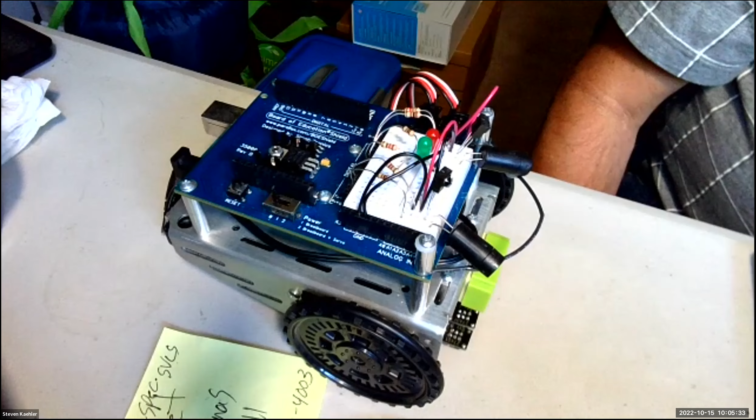Boy, that is really... okay, let me try this again here. I'm going to share. Maybe I'll try it this way. No, let's see. Get rid of that, it's not the one I want. That's the one I want. Okay.

Sorry about the technical Zoom issues here. Good grief. No, come on. Huh, it's interesting, it seems to be mostly having issues just with actually sharing the screen. It's like the camera feeds come up right away, but other stuff takes a while, there it comes. Good grief, okay, so I talked about that. Oops, oh that's weird, why does it keep doing that?

You've got to mute the mic on the video on that side. You've got your video, your audio muted, Steve, and the bot is what's picking up your voice, so every time you talk it switches to the bot video. You're going to have to shut off the speaker on that other one, or maybe it'll be okay now. It seems like it's still doing something wonky. Usually that happens when the sound is coming out of the one that you wanted muted. I don't know if you can turn off the sound on the robot one, or we'll just have it switch to the robot every time you talk, Steve. Who cares?

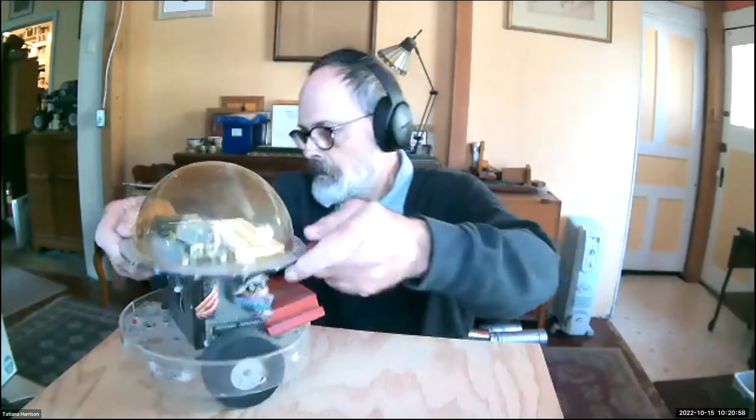Hang on, okay. So what was really cool about that robot was that he was able to create a walking robot with a single servo, because I don't think anybody had ever seen anybody do anything like that before. That was what was so wonderful about that Johnny Walker. Oh, there we go, yeah, that'll help.

Okay, now pull it toward your edge of the table, of the board there. There you go, yeah, there we go. Now we can see the whole thing as it's moving. All right. Can you make it go again for us?

Oh, you're mute, you got muted somehow. So can you hear if I talk now? Yes, we can. Okay, as long as I hold my finger on this button, apparently you can hear me. So what button on the keyboard do you hit to keep being heard? You have to click the mute symbol with the mouse. Oh, there's a mouse. Should be on the bottom. This is my wife's, yeah. Did that work? Yes, we're hearing you. Oh, yeah, that's what we want.

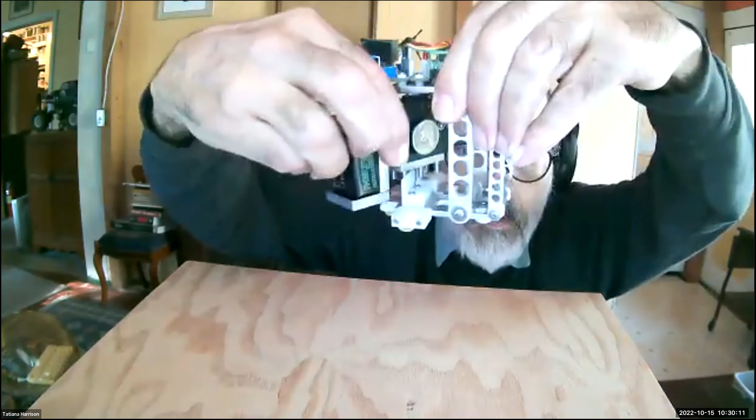I don't know if you can see the pins on the bottom, but that's what makes it go. Each foot, all it has is an L-shaped piece of plastic attached to the foot, and the pins are what make it walk. See, the pins push the feet, and that's why we needed the friction, so it would push the foot and then keep it there and then move on. And it can do slight inclines, but it's not designed for any kind of tilting or rough material or anything like that.

But yeah, it was quite an interesting project. I am slowly, and since you remember when this was built, slow is really an understatement, working on a Johnny Walker 2, so it's going to have 2 servos. And on that, I wanted to do something a little different. And of course, I'm a total masochist, so one servo would control a foot moving forward and backwards, and the other one would do the lifting up and down. You think, oh, that makes sense, until you realize you still have to deal with all the balance and how do you do the turns and all this stuff again. But yeah, I'll fiddle around with it.

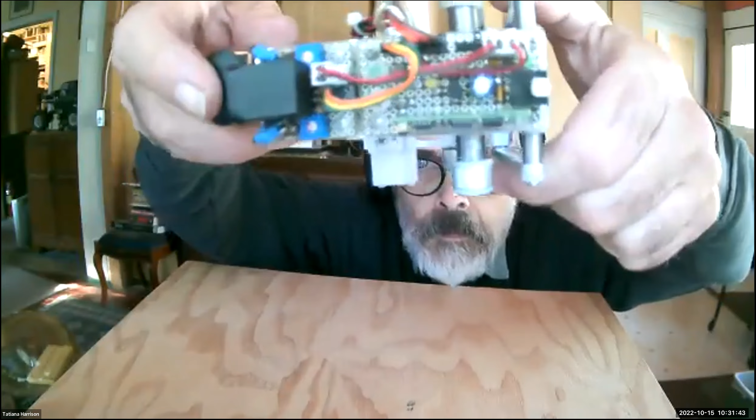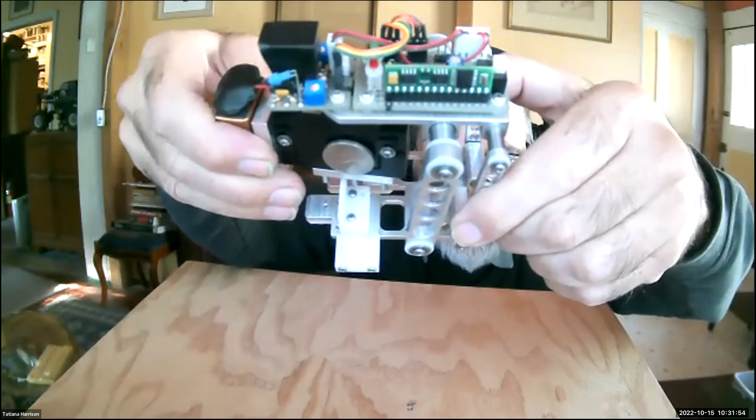That's pretty tight. Huh.

Very cool, thanks for sharing. Yeah, thanks Bill, that's a blast from the past, that's for sure.

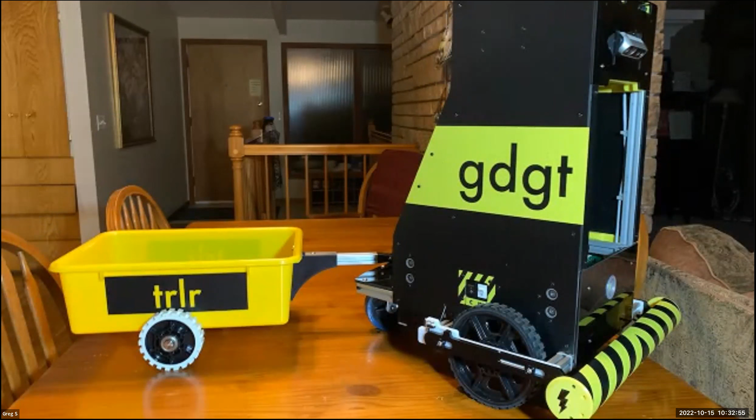I recently, as you can see by my backdrop, put some vinyl stickers on Gidget and her trailer to kind of add a little branding there. And to further that branding, I've got the Gidget Pit Crew t-shirt.

So, on November 5th, I may not successfully get the can out of the refrigerator, but I'm going to look good failing. In terms of progress, I feel confident that Gidget can locate the can, grab the can, and carry the can. Obviously, that's not going to accomplish the task if she can't find the refrigerator and get the door open.

So that's what I'm currently working on. I believe I've got the code done, or close to done, for identifying the refrigerator. And I'm currently working on code to navigate to the refrigerator, and then I will work on getting the door open.

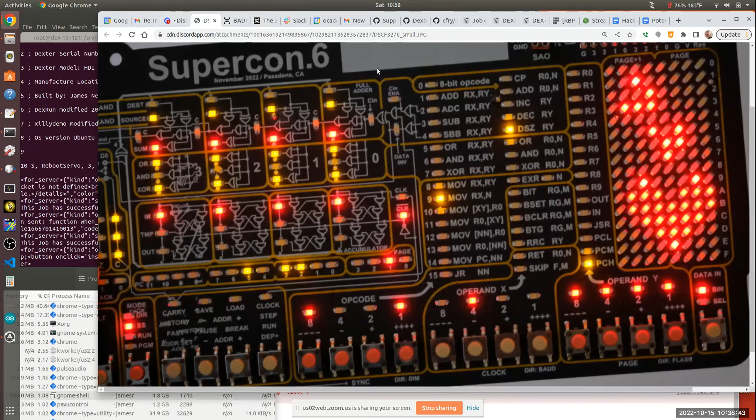No, I think there's a picture of the hardware expansion board. It's sort of reminiscent in a way of the old Altair, where it's lit up from the front, that's what it reminded me of. I was playing with the Altair, right, all of those front panel type machines with switches.

So anyway, I just thought it was absolutely beautiful, and I wanted to share that, even though it's sadly not a robot. I'm trying to figure out how to find time to hook a couple of servos up to it, and that's why I was asking about that walking machine. It's too complicated for me to build, but if I could, I'd make my badge walk with a single servo. I think everybody at the show would really love that.

Well, thank you for sharing that. And if it's cool technology, we want to hear about it. So don't feel like if it's not a robot we can't talk about it in an SRS meeting. We're a little bit more open-minded than that. You know, it's got to at least have legs. No, well I figure anything that's a computer is potentially a brain for a robot, so it's a robot component.

Does it have outputs that you could set stuff up to? Yeah, absolutely, there is an output bus, and they're supposedly making a breadboard board for it, so you'll be able to have it in the same shape as a solderless breadboard, but it's a PCB, like those little things Adafruit sells where you breadboard it first and then solder it onto that. So you can have the same kind of layout as a solderless breadboard. I'm going to see whether or not I can hook a servo up to it and get it to actually move something, and have my badge wave at people or something like that.

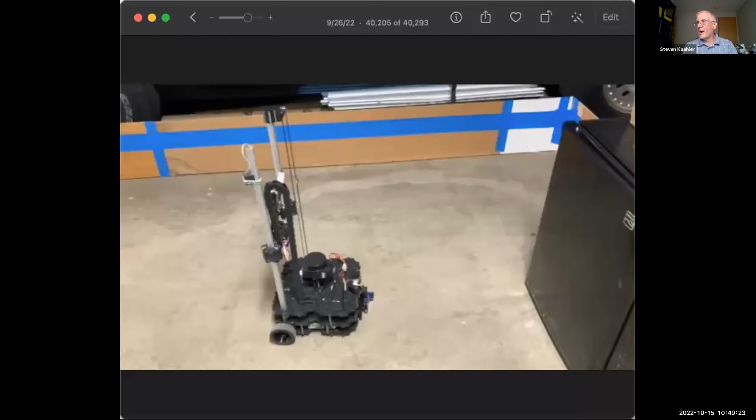Hi guys, yeah, let me bring up my screen here. That's a really awesome high-tech background you have there. Oh, yeah. So can you guys see a screen there with my setup? Yes, okay good.

So I thought I would share a little bit of what I've been doing recently. It was navigating and retrieving a pop can, but I got this little three-minute clip of it actually opening and closing the door. So we started here. The perfect video for the perfect time.

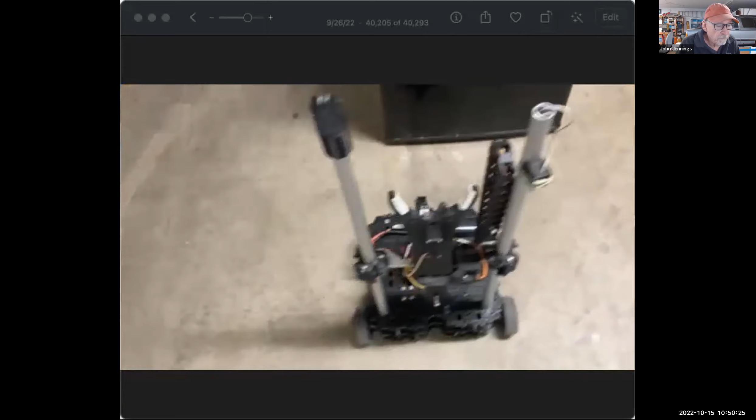One major problem I discovered at the last practice session was it had really bad traction on the concrete floor. So I ended up moving the wheels to the back end of the robot underneath that elevator, along with changing some of the wheels and the caster. Unfortunately, that screwed up my plan on how to open the door.

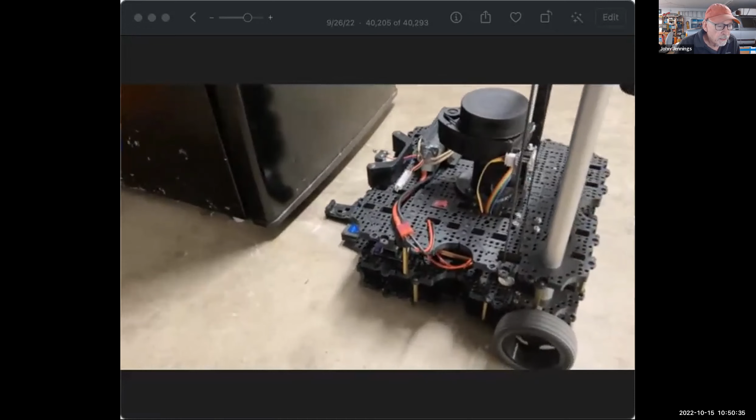Door open. Now that the wheels are at the other end of the robot, I wouldn't be able to maintain that position on the door.

So what I ended up doing was using a program that comes with ROS called... let's see, what's it called again... ROS bag files. ROS bag files are basically recordings of messages on the topic you choose, and then you can play back that message. So what you're going to see in a second here is, after it gets the door cracked open...

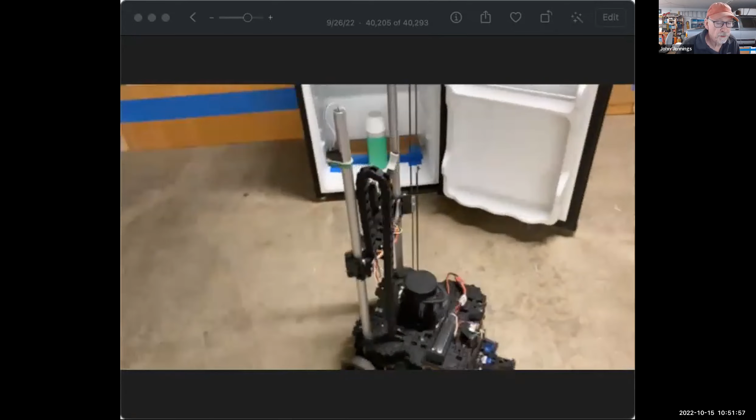And then once it's in front of the door, I'm skipping ahead so you can see it actually closing the door. In which case I'm using the same type of process, playing back a bag file that I recorded where it's actually just closing the door.

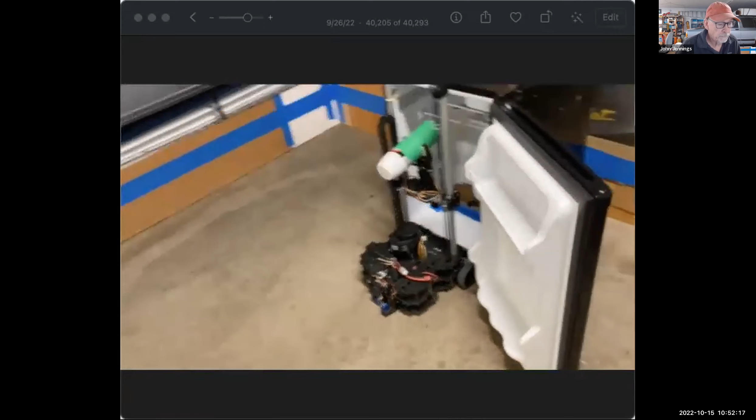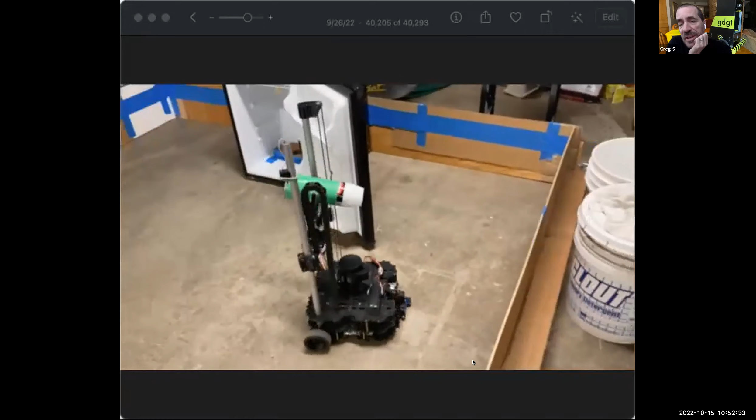Well, that certainly answers a question for me, John. If a TurtleBot, because I have one so I know what it can and can't do, if a TurtleBot can pull the door open, my other one's definitely going to do it. But John, is that using your Jaws of Life door opener?

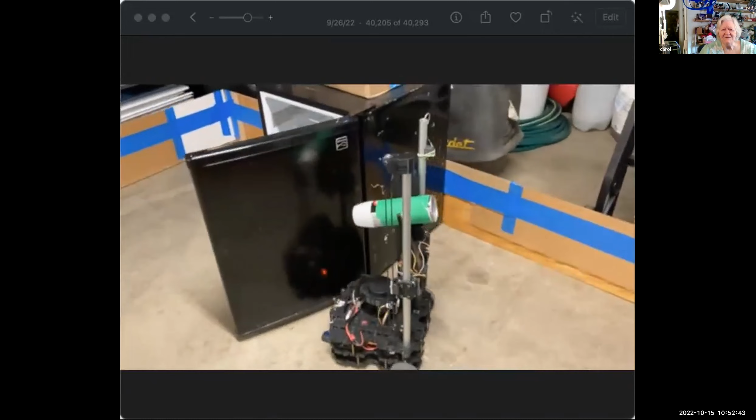Yes. Can you explain exactly what that is? Oh, it's just a homemade linear servo, or actuator, and it's reaching in and getting into that gap between the door and the refrigerator, and pulling that open with a little hobby servo. It's just turning a screw to spread that open, while pushing against the frame. So he's not using the drive motors to break the seal. Correct.

Gotcha, and what size actuator or servo did you use? Oh, it's just a little tiny hobby servo, because it's just turning a very fine threaded screw to open it up. So it didn't need a lot of force, it creates a lot of torque just by turning that screw. Okay, because I have several other actuators that I could probably do the same thing with. Is it a continuous servo, or were you able to achieve that? Oh yeah, it's a continuous rotation servo.

So please proceed. Well, thank you very much, Steve, for inviting me here today. So hello, everyone. I'm Nicholas, based in Montreal, bit of a roboticist. Let's call myself a full stack hardware engineer in a lot of ways. So as Steve mentioned, right now I'm the CTO of Halodi Robotics, a Norwegian robotics company.

So speaking of international, it's nice to bring, especially with the technology we have today, people from all around the world to work on a common passion. So that's what you see in the top left. We build about a 6 foot tall humanoid robot currently used in security guarding, some Industry 4.0 applications, and retail.

We recently signed, I think at the beginning of this year, the world's largest order for humanoid robots, ADT Commercial, so the blue hexagon. They ordered hundreds of robots that they'll be deploying over the next year or two as security guards. Basically, can we help automate the dull and dangerous task of that 2 a.m. night shift that's just going up and down that dark hallway, not doing much.

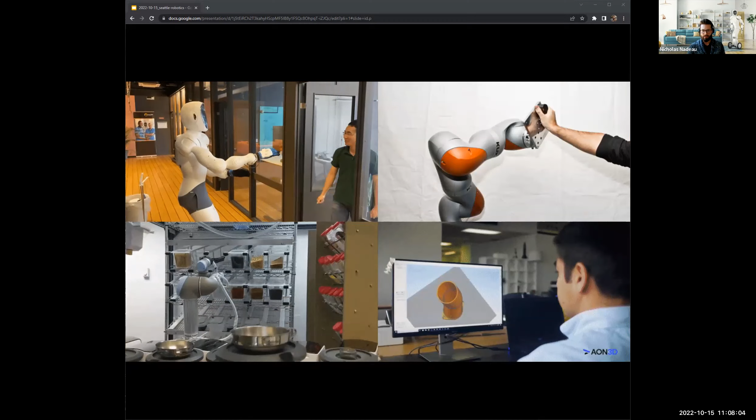Otherwise, did my PhD at ETS, École de Technologie Supérieure here in Montreal, on, as Steve mentioned, collaborative robots, applying a lot of the machine learning, robotics techniques, force control, and things like that to medical ultrasound. So really taking a health and safety approach.

Ultrasound technicians and sonographers, they had a higher rate of carpal tunnel syndrome while performing their work from doing repetitive motions with the probe. And so can we help robots work alongside them and do that in a collaborative fashion, human-robot collaboration, to help reduce the occurrence of things like carpal tunnel syndrome?

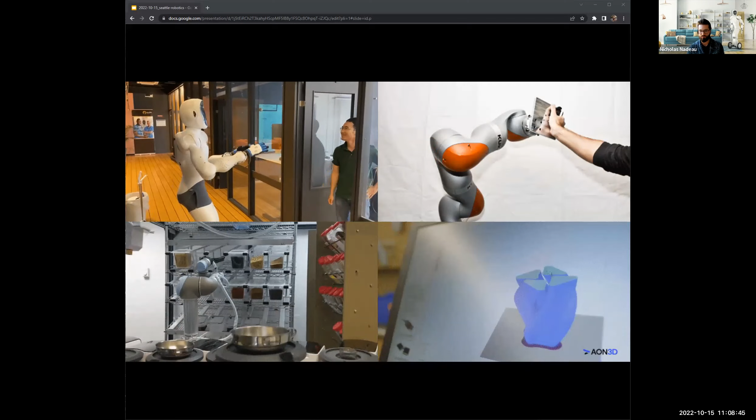Brought some companies through accelerators in the venture capital world. One was a food robotics company using the universal robot arms. Can we automate the kitchen in a lot of ways? Doing these rote, dull tasks that we're having a lot of trouble with, a human labor shortage right now.

And then I spent a period of time actually as the head of engineering at AON3D, an additive manufacturing, so high performance 3D printing company, where we're able to print very large, so about a meter tall by half meter by half meter print volumes of PEEK, PEKK, and Ultem, mostly for the aerospace, medical, military markets. And we actually got the first parts on the moon and the space station built out of Ultem. So that was a lot of fun.

And so today's talk, we could save for the discussions. I'll talk deeper about like Halodi or anything like that. But it's going to focus mostly on Pybotics, which is the software package in Python that I wrote back in the day. Steve asked me to talk a bit about that.

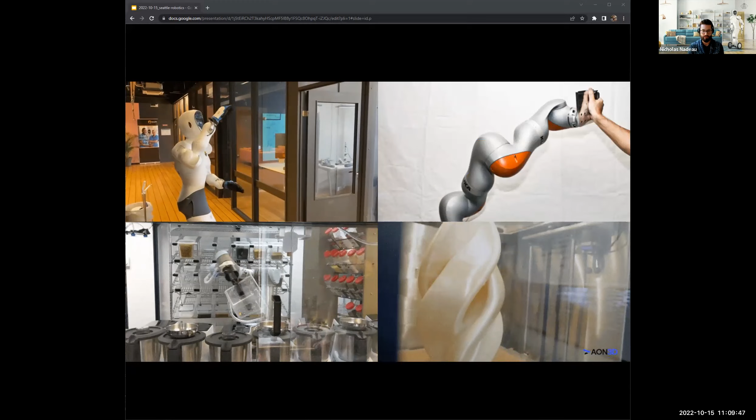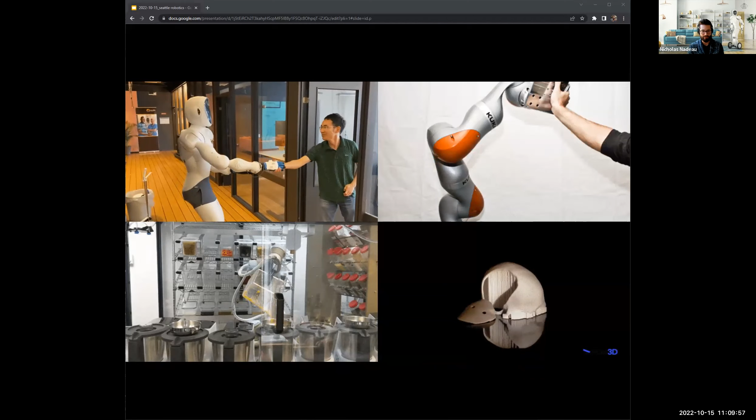We're going to dive into some of the ultrasound work, some force control, robot optimization, robot calibration. A lot of this actually stems from my original background was in mechanical engineering. So I started off as a mechanical engineer in the biomedical field, designing brain implants, brain imaging devices, things like that, and eventually got into surgical robots. And from there, I realized that accuracy, calibration, all those things were pretty important. So we'll be talking about Pybotics and calibration. We'll be going into impedance control calibration, some hardware in the loop stuff, especially seeing the projects you guys demonstrated today.

Each of the joints in the KUKA robot is a harmonic drive gearbox. I won't get into the details of that, but let's just say it's a very, very large torque ratio, or drivetrain ratio, between the input and output stages. And this allows you to create very precise motions. Unfortunately, each of those gearboxes costs anywhere from $1,000 to $2,000, which makes it a very expensive robot, especially when you have 7 degrees of freedom on the left.

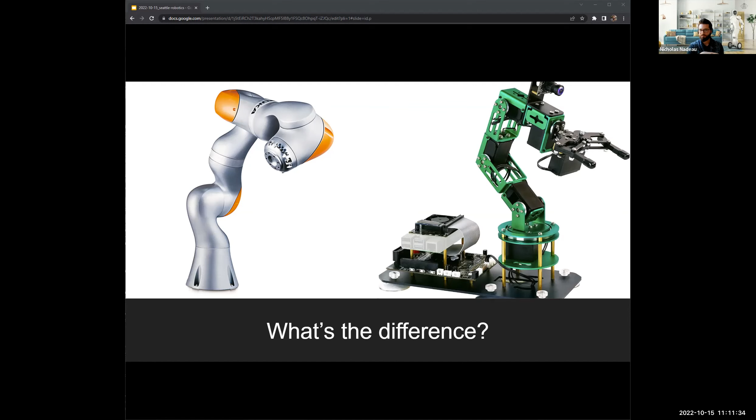A lot of people mix up these two terms. There's precision and there's accuracy. Precision is also known as repeatability. Robots are very precise out of the box, especially industrial robots. You can go back to the same position in space over and over again. With a high-end industrial robot, you'll probably hit it in the 1 to 10 micron precision range. But out of the box, a lot of these industrial robots are absolutely terrible at accuracy, anywhere up to a centimeter outside of your target position in space.

This really stems from the fact that robots work in joint space. So when you command a robot to go to the same location over and over again, it's essentially saving those joint encoder positions and just going to that very accurate joint space position. When you tell a robot to go to an arbitrary position in your XYZ Cartesian space, it has to really figure out where that is using things like forward and inverse kinematics. And you have all the little inaccuracies from machining, from assembly of the robot, up the kinematic chain that produces an inaccurate final positioning of the robot.

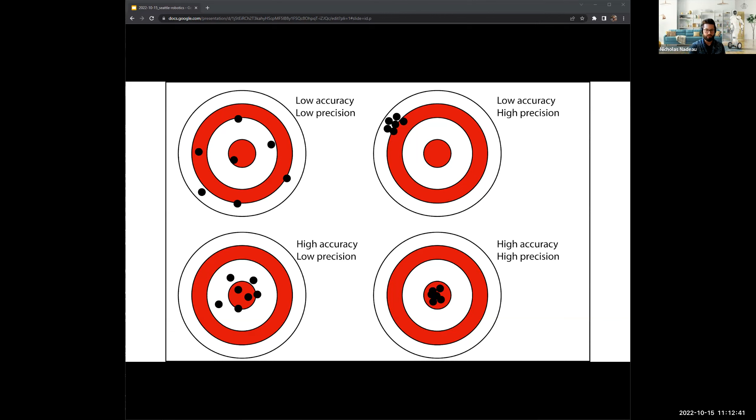So where is accuracy important? Well, it really comes in when you're doing things like offline programming, which is more and more popular in the industrial space. You don't want to necessarily shut down your whole assembly line to program your robot for the next job, because time is money. So instead, we simulate the robot work cells and production lines offline, able to do all the motion planning and everything ahead of time, and then deploy them onto the robot. So you have much more reduced downtime.

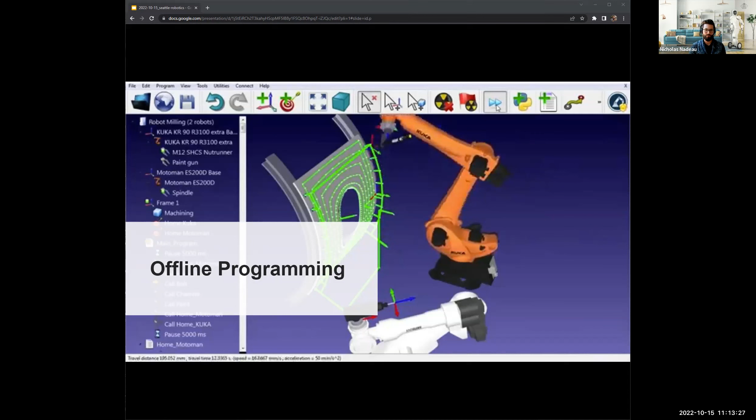And as a roboticist, you get to do all your programming while you're in your PJs at home. The unfortunate part is if your robot in simulation isn't the same model as your robot in the real world, it will lead to a lot of collisions and crashes. So we want to make sure that the sim-to-real gap is minimized as much as possible. By calibrating the robots, we're able to more accurately transfer this offline plan to the real world robot and achieve the results we expect.

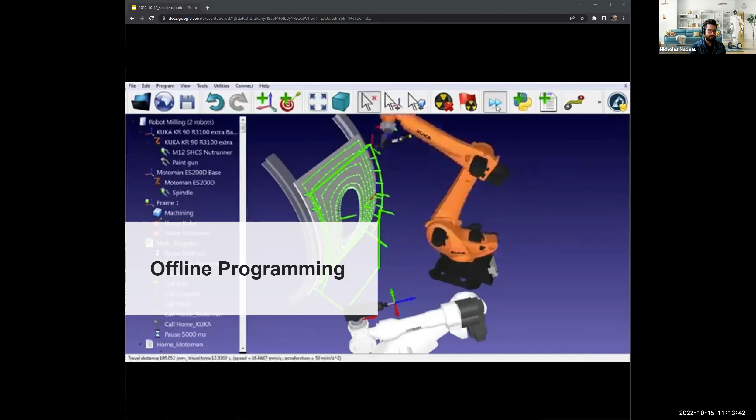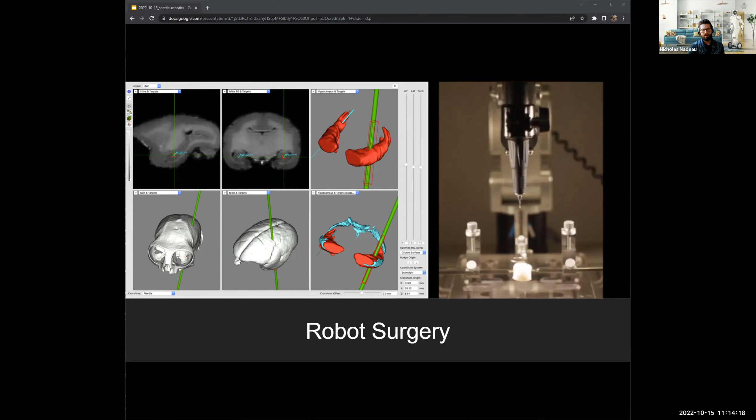So what are we actually doing when I say calibration? Well, we're correcting for the joint inaccuracies, the position inaccuracies, the distance inaccuracies along the kinematic chain. My favorite way of describing robots is modified Denavit-Hartenberg parameters. You have essentially 4 parameters per joint along the kinematic chain. And what you're trying to do is get a better value for those parameters in an iterative fashion, such that the transforms along the robot's kinematic chain are as accurate as possible and match the real world robot.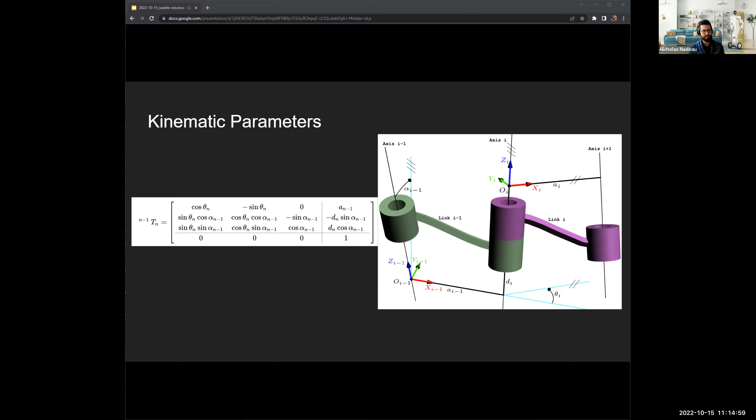Most robots out of the box, the company will provide you what the nominal kinematic chain is supposed to be, and it's nice round numbers usually. When you start to do the calibration, you find out what the actual values are.

So why did I put together Pybotics? Back in PhD days, I realized that everything was a MATLAB toolbox in the end. I could go down a rabbit hole of why I do not enjoy MATLAB. So I wanted to put together something that was in the Python ecosystem, which was much more open source, much more freely available to everyone outside of academia, and really be part of that open source movement of democratizing these tools.

I also want to connect it to the ongoing work in the scientific compute and the ML ecosystem. So everything from scikit-learn to NumPy to SciPy and the TensorFlow, PyTorch packages that were starting up 10-ish years ago. If we could vectorize our robots, we can then basically apply machine learning and optimization to them using these open source tools, which got me thinking.

It's freely available, if any of you want to check it out later on. I have Jupyter notebooks and everything up and running for demos. It's actually been published, so there's open source publications as well talking about this, and a whole bunch of applications using this in the real world.

Otherwise, the big focus of this package is really to do kinematics, dynamics, and calibration such that you're more easily able to do trajectory generation, some other robotics algorithms, and the AI ML attached to that. So it's a bit heavy on the mathy side, but it's one of those fundamental tools that lets you really get started and then go on further to explore and optimize your application.

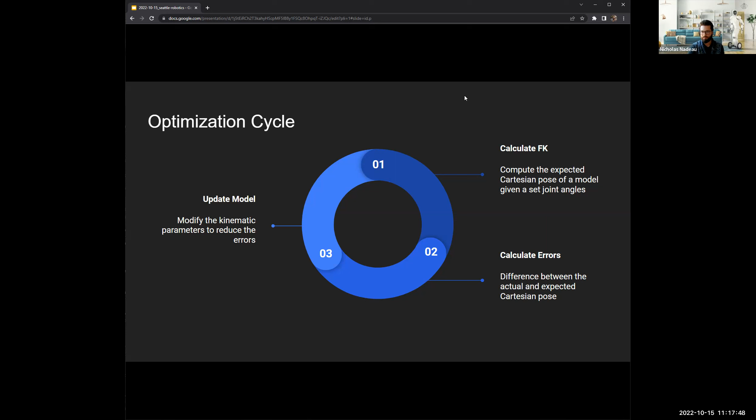So what this looks like in the actual code: first we calculate the forward kinematics and compute the expected Cartesian pose of the model given our joint angles. We calculate the errors between what the nominal model says is the position in space and what we actually measured. And then we update our model accordingly and we try to recalculate. It's just a big cyclical loop until you get a better model and an error that passes a threshold that you set.

In Pybotics, the way I set it up was I want to vectorize my robot. I want to represent the robot as a vector of floating point numbers, essentially, that we can minimize. So the robot is modeled as a vector of your tool frame, your kinematic chain, your world frame. Your tool frame is essentially your transform from your last joint to your tool center point. So like what Greg was showing there with his big jaws of life claw, it'd be the transform from the attachment point on the rest of the robot arm all the way to that, probably the last tip there, or maybe even the center of the gripper.

Your kinematic chain is your modified Denavit-Hartenberg parameters along the robot. So you have your alpha, your A, your theta, and your D, which represents your transforms along the robot arm. And then you have your world frame, and this is actually probably one of the most important frames on there. It's really, where do you designate the origin of your robot space to the base of the robot?

I got to, during my PhD, play with some really fancy tools, and I'm not going to lie, this was a lot of fun to play with a Faro ion laser tracker.

This is essentially a measurement device that lets you measure any position in space using these spherically mounted retroreflectors, or SMRs. It lets you measure an accurate position in space at plus or minus 5 microns in a 50-meter sphere. So a super accurate little R2D2 bot.

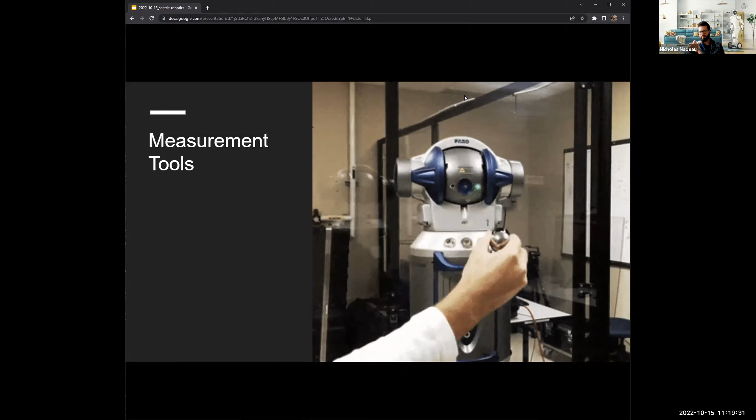We essentially attach the SMRs to the end of the robot and move the robot around, having this little R2D2 track the robot's position in space and build up a data set of positions.

This is what the measurement process actually looks like. I attached a plate to the end of the robot with that SMR attached, and had the robot do a dance for hours upon hours upon hours. And like any good grad student, this was probably filmed at 3 a.m.

I wanted to collect the best data possible, so doing it in the middle of the night when no one was around meant less vibrations in the building and everything like that. We eventually come to having a point cloud of positions in the robot's workspace that we can then optimize around.

With Pybotics, I was able to make the whole optimization process, going from an inaccurate robot to an accurate robot, just 29 lines of code, importing standard Python tools like Pandas, SciPy, and scikit-learn. We're able to load a robot model from Pybotics, which represents that vectorized version of the robot and its kinematic chain, and load our positions and joints from the CSV of the data we recorded.

With scikit-learn, I like to split the data into a training set and a testing set, and then we optimize, running for the most part just a least squares optimizer to minimize the model's errors with respect to what we measured in the real world.

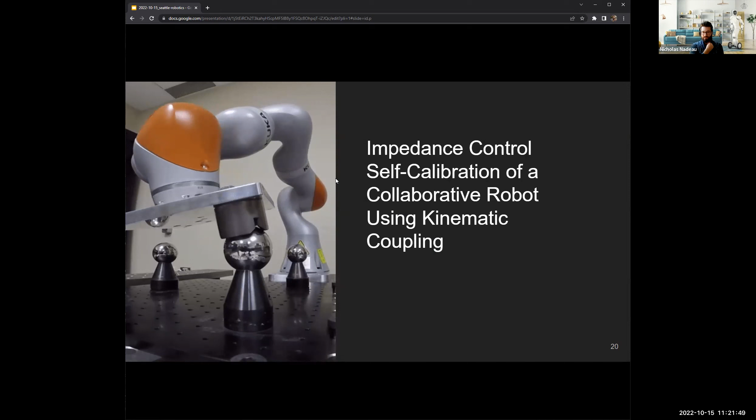So we developed a method to try and reduce the barrier to entry into calibration. Using basically standard mechanical engineering tooling balls and kinematic coupling, this whole setup costs less than $1,000 compared to the $100,000 laser tracker robot.

The tooling was composed of the calibration plate with large tooling spheres and a trihedral coupling, which has a magnet embedded into it. This helps it stick onto the tooling balls as best as possible. And especially since this was a force-controlled robot, we were able to take advantage of that force control to get a more accurate coupling to the spheres.

Everything was sourced from standard online vendors like McMaster-Carr, nothing too custom, nothing too crazy. And prior to running this whole experiment, we did the laser tracker method in order to compare the two methods with each other.

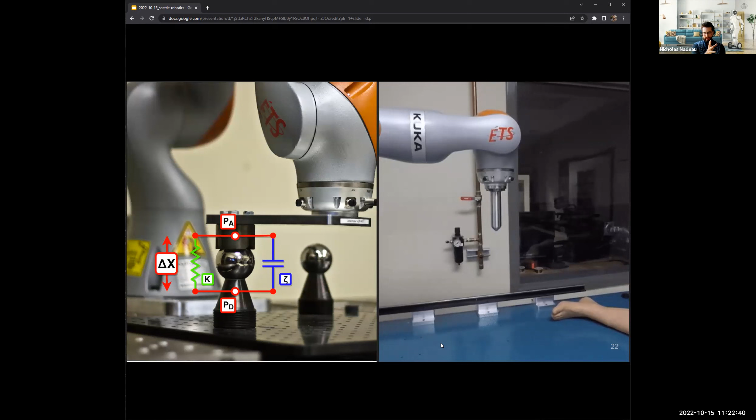From a controls perspective, we really exploited the built-in real-time impedance control of the KUKA robot. Being able to create a virtual spring-damper system with the robot, we're able to get close enough to the sphere and then just let the magnetic force pull the robot that last little bit, with a variable stiffness, to make sure we were fully coupled to the sphere as best as possible.

It was a lot of fun because, once again, the robot out of the box is inaccurate. So we don't know exactly where the sphere is, we know approximately where it is, we get pretty close. But if I try to go in a full position control way straight to the sphere, I probably collide with the sphere over and over again, damaging the robot, damaging the sphere, and messing up my tooling as a whole.

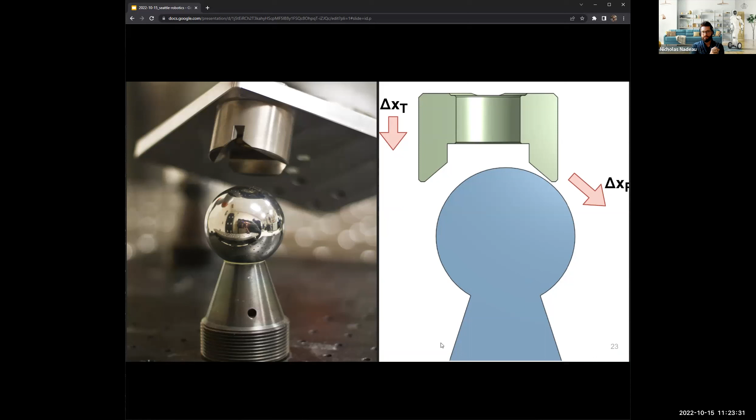By getting as close as possible with position control and then switching into an impedance control paradigm, we're able to snap and self-center onto the tooling sphere. This is what the process essentially looks like: come in with position control and you get a little snapping action, and then we're also able to just move around the sphere, so once you've coupled to one sphere position, you're able to rotate around there.

So you can maintain one virtual point in space, but collect many different joint configurations around this virtual point. And since this was a 7 degree of freedom robot, we have a redundant axis, so we're actually able to move the robot through the null space. We're able to keep one position in real space and move the robot's body fully without moving the tool position at the end. And this was a lot of fun.

So the way I logged the data was snapping to the spheres, waiting a little bit to let the torques and vibrations stabilize, and then recording many positions and poses with a constant final tool pose while moving the body through the null space, then moving around and repeating that, collecting hundreds, if not thousands, of poses. Once again, this is the KUKA LBR, so 7 axes, and we could take advantage of the redundancy to move through the null space while keeping a final tool pose.

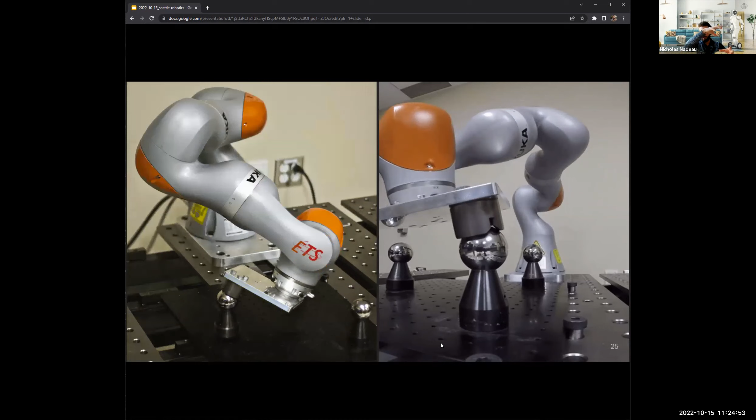Once again, using this data of positions in space with respect to joint configurations, going through a standard minimization process using Pybotics again. So this is a combination of the data from the laser method and the sphere method now. And out of the box, this really expensive robot—back in the day, the KUKA LBR was about $200,000, something crazy like that.

Out of the box, it's about 2.5 millimeters inaccurate in space. If you're paying that much money for a robot, you expect it to do better than 2.5 millimeters of inaccuracy. Using the laser method, we're able to get it down to less than 0.9 millimeters absolute accuracy in real space. And using the very cheap sphere method, it was actually pretty similar to the laser method—not as good on average, but the max error achieved was comparable. So it was really nice being able to compare $1,000 tooling to $100,000 tooling and help democratize calibration to the masses.

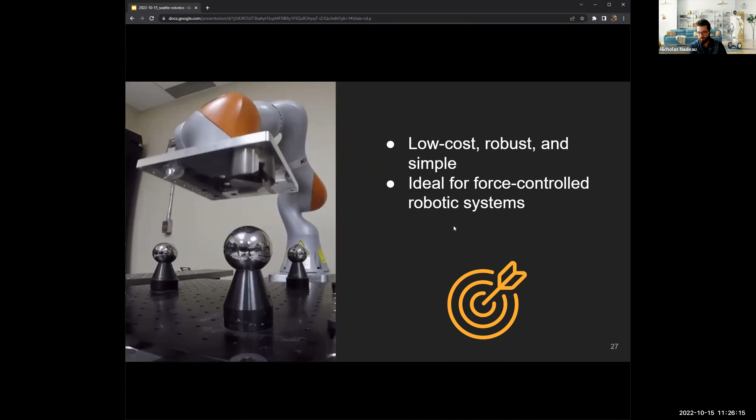So simple, low cost, robust. It was really nice because since everything's just steel, you could put it into more rough environments compared to the very fragile laser tracker. Because it's low cost, we could maybe even equip every work cell in a factory or facility with this next to the robot, such that every week or so, the robot could just turn to the left and do its own recalibration. This was really taking advantage of the incoming trend of collaborative robots we were seeing, and the more accessible force control and impedance control methods coming out.

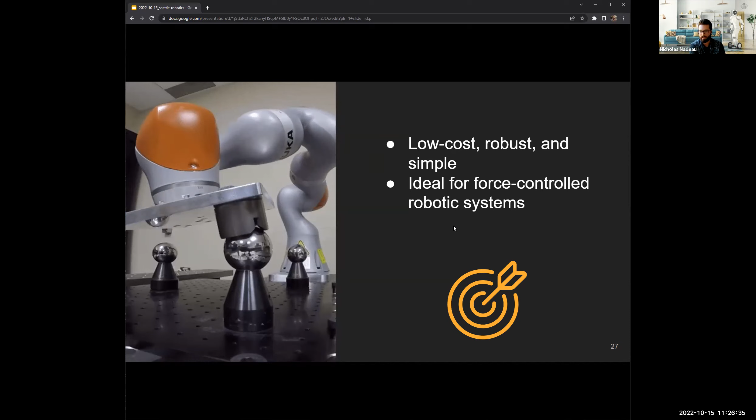So we had robots running, robots being calibrated. How can we make this whole process more efficient? Essentially, have the robots run themselves at a certain point.

One thing I noticed in the whole machine learning and robot optimization workflow is we had to collect a lot of training data. We had to model everything, make predictions or optimizations, and update our model and repeat. In the typical approach, that involved a lot of CSV files and running things manually, collecting the data, copying and pasting things and moving things around. But I wanted to make this process a lot more optimized, especially if we want to make it more accessible to the real world.

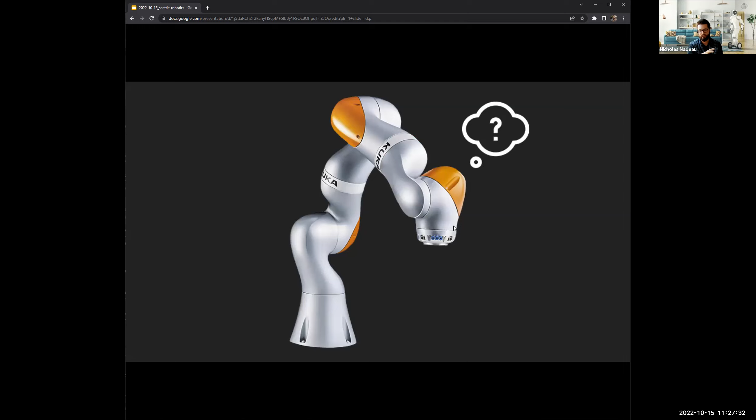One of the things is robots have always been, up to a certain point, isolated. You program them with teach pendants or offline programming, deploy it, and then they repeat the same thing over and over again. But how do we actually connect these robots as physical agents, essentially, to the software process?

It was really interesting because, for instance, the KUKA robot was running a really old Java stack—I think it was Java 1.6—and all the data science and machine learning side of things is all in Python. So how do we connect these two running systems in parallel?

My best friend over the past little while has been gRPC. If you ever had the chance to play with gRPC to communicate things back and forth, it's a lot of fun. It's available, open source, available in basically every programming language now. This essentially lets you solve the communication issues between different systems.

It lets you create a client-server model between the robot and the Python stack. So the robot is essentially a server that performs commands on a queue, and your Python stack, or your computer, your tablet, whatever, is a client that connects to this arbitrary robot and says, please do this for me, please do that for me. Being that the robot was a server in the eyes of the data models and training algorithms, the function callbacks from optimization—like evaluate the next pose, try this, try that—are just part of the loop. You just call a function saying, robot, do this, collect the data back, and you could keep this running in an optimized way, in situ.

The return value from performing actions would be the robot sensor data for doing this calibration. For those not familiar with gRPC, it's really nice because we get to define our communication framework and our service in a language-neutral proto file.

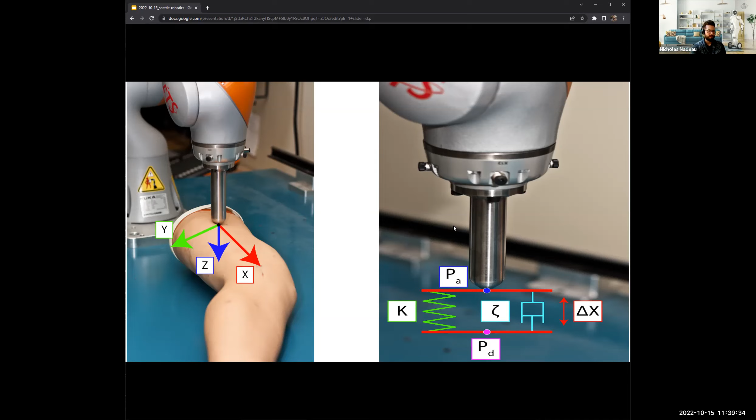This was the first time I tried this, so this is a model human limb. It's actually anatomically correct. There is a bone structure in there, skin layers and muscle layers in there. It's really to replicate the human body as best as possible.

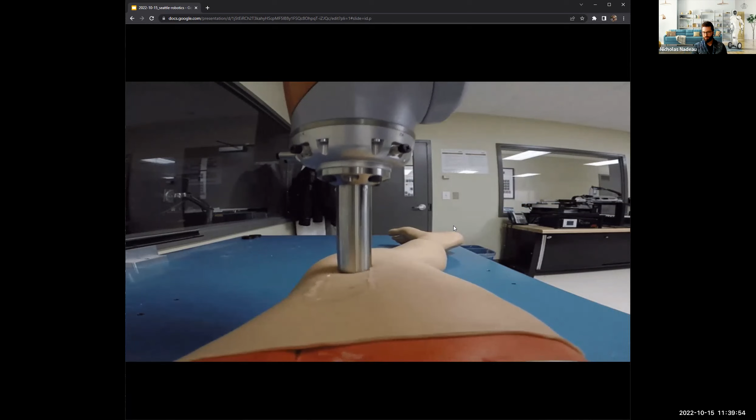If you apply just out-of-the-box motion control or force control to try and move on it, you get this very bouncy motion, because the robot's trying, in its control loop, to maintain a force, bounces off, tries to maintain that force, and you just bounce along.

So this is a safety concern, and trajectory planning as a whole is a safety concern, because we want to make sure that we follow the trajectory that we want without clamping the person, without injuring the person. We don't want to overshoot our forces when trying to clamp down.

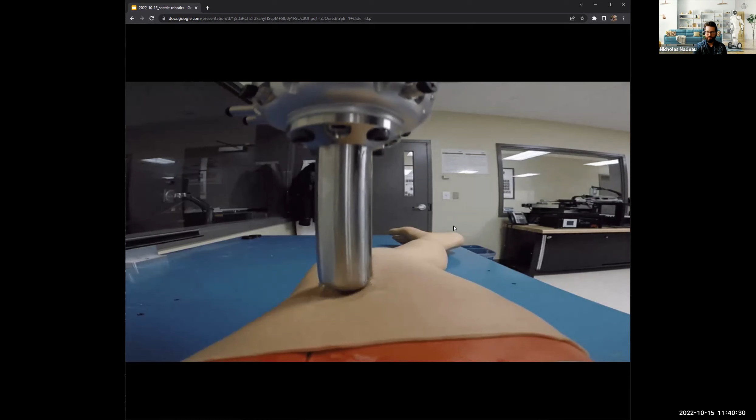So what I wanted to look at is, can we have sort of a hardware-in-the-loop tuning framework to really optimize our force control for the different regions of the human body?

Same idea as before, have the robot in the loop. In this experiment, I used differential evolution, a method inspired by biology, trying different things and then merging the results into a population of candidate solutions that create new solutions through recombination, allowing you to really explore all the possible models for robot control.

This is especially important for robotics because there's no real single solution, and the overall solution space is assumed to be pretty noisy and not guaranteed to be differentiable, which is super important for other techniques like your standard least squares.

Having the robot in the loop, I was able to have it self-tune along this human leg, eventually finding a model that worked well enough that we could transfer it off into other humans and things like that. It was only after about 700 or so sessions that we were able to converge on a pretty strong solution.

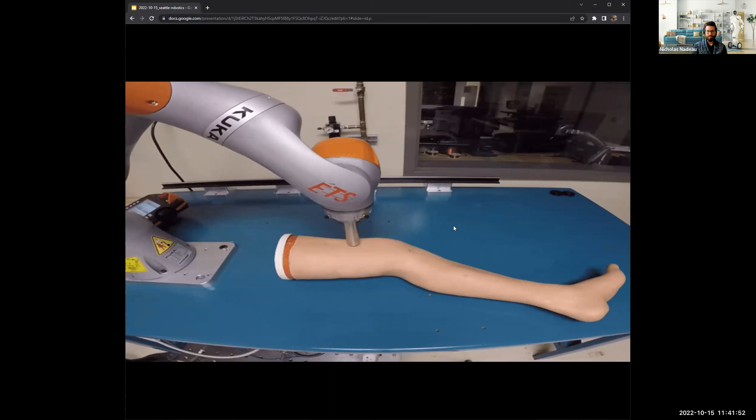700 sessions sounds like a lot, but when the robot's doing everything itself, it only takes about 20 minutes for it to figure out the best control method to move along the human body. Eventually we were able to do smooth motion along human limbs with an error of only about 0.5 newtons throughout its entire motion compared to what we wanted to press.

One important part of doing medical ultrasound is not necessarily maintaining a given position, but maintaining a given force along the human body, as the human leg will compress in different ways in different regions.

A lot of fun, a lot of people questioning what I was doing in the lab when they would walk by the window and see a human leg on the table and a robot poking along it.

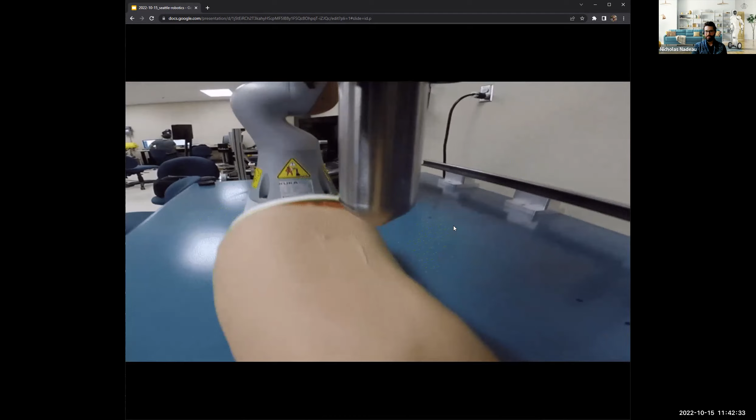Total optimization time was measured in minutes, since everything was automated in a loop. Even though this probably won't be used in the real world in medicine for a long time, the same idea of having hardware in the loop and self-optimization can be used in everything, from the calibration we saw before to the robots you guys were looking at for opening refrigerator doors, to a little bit of anything.

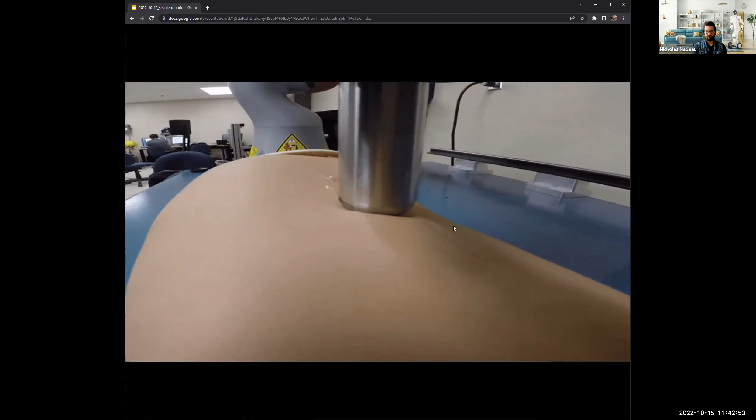Anytime you want the robot to do this, it's essentially a cheap form of reinforcement learning at a certain point, but instead of a black box neural network that no one understands, you're using the actual robot parameters that you program.

How do you compensate for the human factor? Here you're using a false leg that's going to be in the exact same position every time, but like I know when I'm laying on an exam table, if I even just hiccup, I've changed my position a little. So how can the robot compensate for the human?

For this particular experiment, I'll use the very academic answer of it was out of scope for that particular experiment. There was some follow-on stuff that started using computer vision, so you have a separate camera in the OR space that tracks the leg.

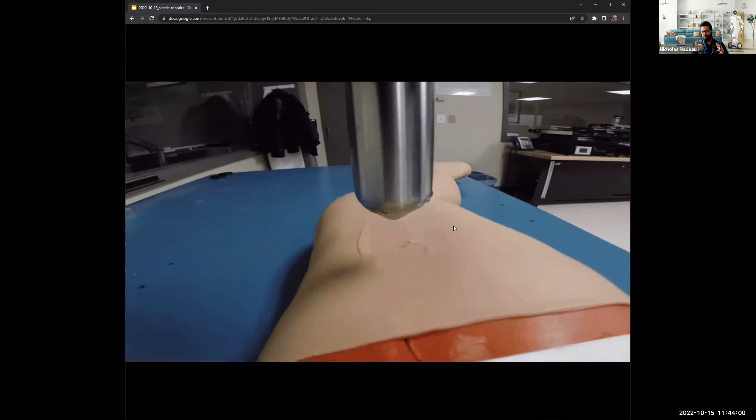And then you're able to essentially match and coordinate the robot to the moving frame of the patient. As long as the patient doesn't move too fast, you're able to track where the patient's leg is going, and the robot, when doing these motions, is always seeing a frozen frame of reference because you're essentially shifting your frame with respect to the human.

Okay, that's tracking dancing motion and stuff. Yeah. Okay, James, I think your hand is up.

I'm curious, when you say, quote, hardware in the loop, I'm a little curious about what exactly that is. Are you talking about an embedded system, an FPGA, or... I'm saying the whole robot.

Yeah, so the whole robot, basically taking the robot to essentially—I hate using the word learn, but it's essentially self-learning its optimal model by repeatedly doing things.

So this is the actual robot, the robot's full controller, which in the case of the KUKA is, I think, just an embedded Windows PC that KUKA provides as the robot controller. That real-time control is embedded in or communicating with the Python stack in order to optimize itself.

And through repeated iterations, as it tries new things, we're actually updating the robot's controller. Yeah, I understand now, thank you.

I was just curious how fast that loop was. So what you're saying is it could go as fast as the robot communicates. And the KUKA in this particular instance had a control loop rate accessible to the outside of about 1 kilohertz.

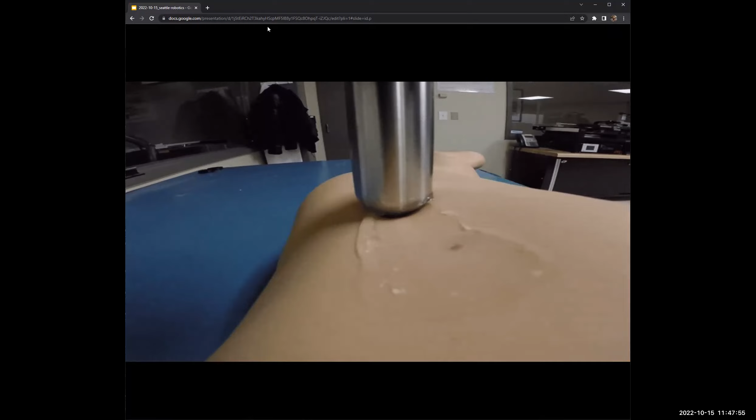So the systems that I've seen where they have success, they do like 1,000 simulations and then they run out and try it on the real thing, and then correct everything back to what the real world response actually was. Then they go off and do another 1,000 simulations, or some number—I'm not saying 1,000 exactly, but that's the general idea. The point is to keep coming back and connecting it to the real world every so often to make sure your simulation doesn't just go off into fantasy land.

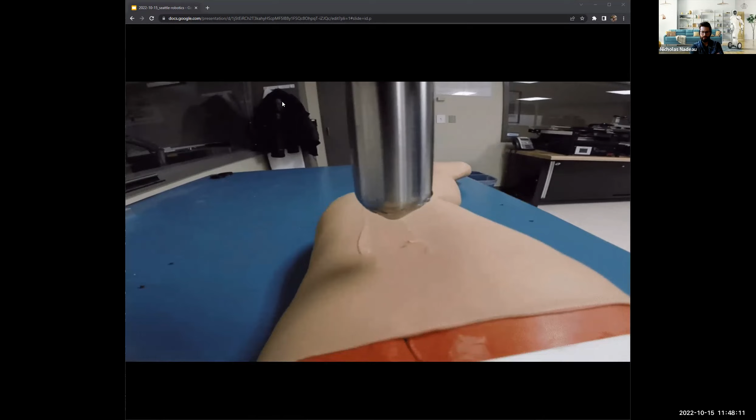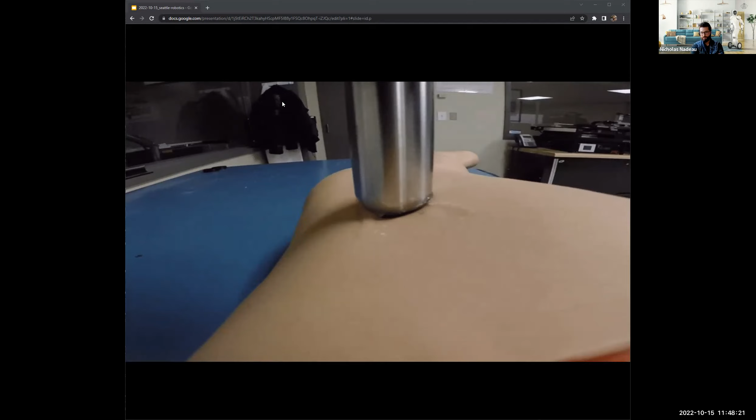Exactly, your simulation doesn't go off into fantasy land, and your simulator is able to capture really bad code. For instance, if your controls team pushes new code, like with my humanoid robot here, and a junior developer pushes something that makes the robot faceplant every 5 seconds, that would be very expensive to repair. So your simulator is usually able to catch that really bad stuff. Once you have good enough performance in simulation, you deploy it to the real world to fine tune it.

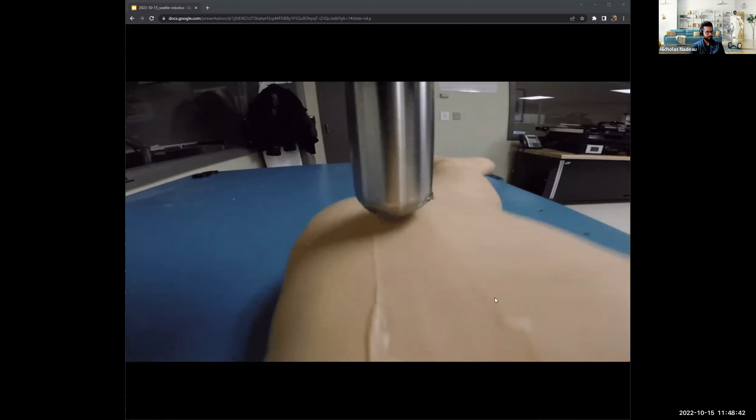I have a few questions if you have time. I have time. Awesome. The specific Faro unit that you were using, I don't see that on their webpage—I was just curious.

This was 10 years ago. That's a Faro Ion back in the day. I think it's the Vantage they call it now. But yeah, the price isn't 100,000 anymore. Sadly, my professor back in the day was very, very cautious of letting grad students play with that at any point. Yeah, those are unfortunately super, super expensive.

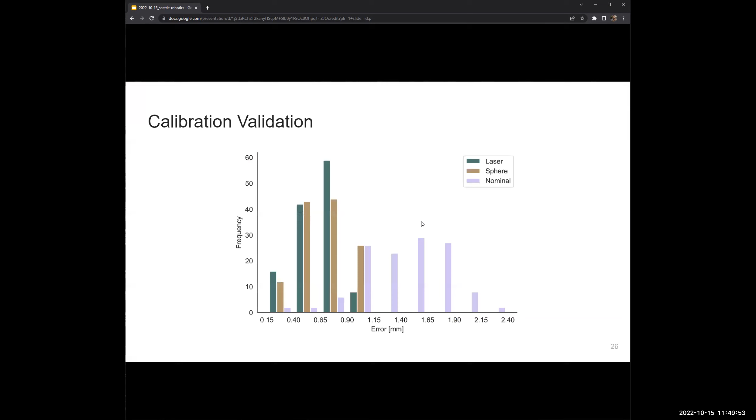Love the idea you had with the magnetics on the balls for lower cost calibration. I'm curious, on the optical breadboard there, you had 3 balls—they're all the same Z height, I would call it. Did you not need to have one at a different height, or try some things that weren't in that one plane, in order to get a good calibration?

It could have been a different height, but a sphere is just a point in space. 3 spheres, 3 points makes a plane. So it doesn't matter what height a third one is—if any two were different, they'd all still make a plane in space.

Yeah, sorry, I didn't ask my question very well. So you've got your 3 balls making a plane, you do the calibration, and now you tell it to go to a position that's not on that plane. In other words, do you not have problems when you exit the plane? You're saying the calibration would be overfit to just the plane I'm working in and calibrating—that's the concern I have. So I'm asking whether or not you had that problem.

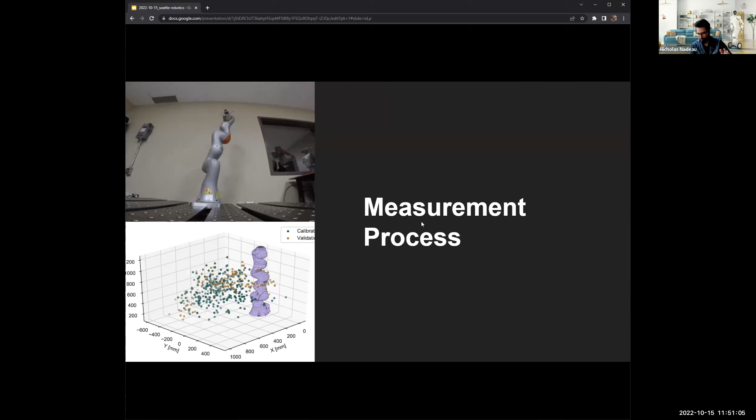No. The robot was calibrated with what you see here, and if I go back—this is the same data set, part of the multi-stages of the same overall experiment—this is the full workspace of the robot. So even though we calibrated in just a smaller subset area, it was good enough for the global workspace of the robot.

Oh, that's very encouraging, that's great. Yeah, so as long as the key was getting as many joint configurations as wide and variant as possible—you want your robot's body to move by rotating. Yeah, exactly, that was really the key point, having that.

And I'm assuming that's a metal fixture with a magnet behind it, so the magnetic field is coming down through it? Or was that actually a machined magnet? No, that's off the shelf. Everything you see here, except the silver plate on the right which is just 6061 aluminum with a bunch of holes, was off the shelf. There's only one custom part there and a bunch of screws.

And basically we also don't care about the accuracy of the 3 balls on the left in terms of where they're placed—we just care to know what their relative position to each other is.

Because when we're doing the actual optimization, the error we're measuring isn't the absolute position of the balls, it's the error of the distance or vector between the balls, between each ball with each other. So 1 with respect to 2, 1 with respect to 3, 2 with respect to 3. This brings the cost down really low, because we could put these balls in whichever position or orientation we want. We just have to measure them with respect to each other, which is cheap to do overall. If you have a friend with a CMM, you could do that in 5 minutes, or there are other methods of measuring balls with respect to each other.

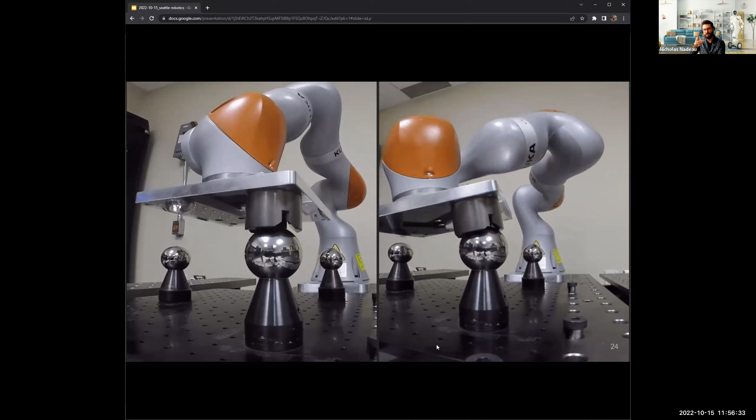Then I'm looking—this robot is equipped with force sensors everywhere—I'm actually looking at the torques at each joint. I'm waiting for the vibrations to dwindle off, which took about half a second, before recording my current joint angles. I'm at ball position 1, and for me that was origin, so 0,0,0. Then I move through joint space, but I'm always at ball position origin—my tool center point is always technically at 0,0,0. This lets me essentially move through hundreds or thousands of joint configurations while always keeping the same position at the tool tip.

So each joint has, as you mentioned, force sensors going in and out of it. And they each have rotational position sensors as well. Exactly. All industrial robots have full access to joint encoders, so you get very accurate joint positions. All collaborative robots, and probably most robots built in the past 10 years, also have access to force or at least torque data at each joint. This lets you do things like force control, and lets you record the torques along each joint to look for contact and similar events.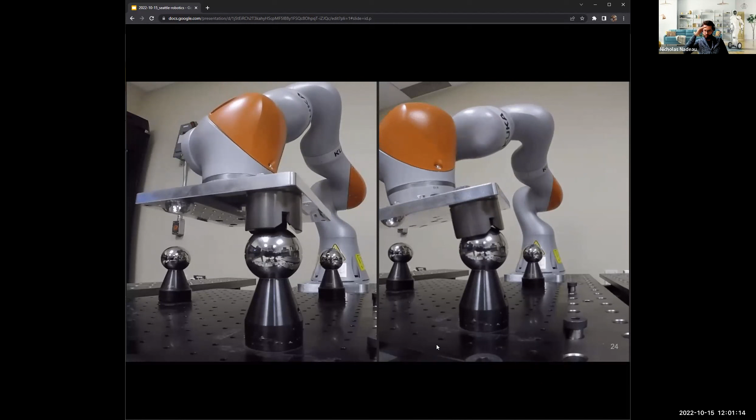So the ball, being that it's a perfect sphere, a machine tool sphere, it's accurate in terms of mechanical engineering, like spherical roundness to 0.00001 inches or whatever - it's a very, very accurate ball. And your kinematic coupling, because it's 3 perpendicular faces that snap onto it, if you rotate around a perfect sphere, you're always maintaining a virtual center point that's the same. So we're essentially rotating around the exact same virtual center point. As long as we're in full contact with the sphere, and that's what the magnet is for, to always maintain that contact, we are always at the same point in space while being able to change our angle around the sphere. You're using the center of the sphere as the point of contact. Exactly. So our TCP, if you will, is the center of the sphere. Just like gravity.

So I'm curious about the magnet again. Is it a strong magnet? But that gray thing with the shape of the ball milled into it, is that itself a magnet, or is there a magnet behind it?

So the triangular trunk is just steel. The ball itself is steel, no magnets involved there. The grayish cylinder with the rectangular cut has 3 machined faces that are perpendicular to each other. In the center of that, concentric to the outside cylinder, is a threaded through hole with a threaded magnet that goes into there. So you're able to swap out magnets, change the force by swapping them out, and also able to change the position of the magnet - if you want to maintain the same magnet but bring it a little closer to get more magnetic force, you're able to do that as well.

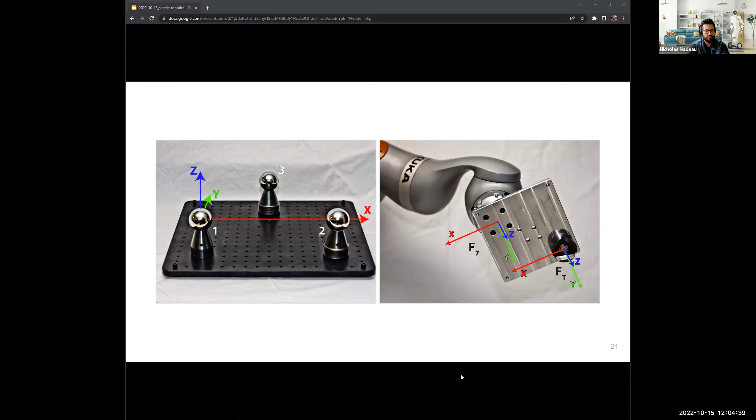So James, to answer, I think they call it magnetically preloaded kinematic couplings. I'm going to copy the link and paste it in the chat. That looks like it. So it's just a rare earth magnet with a thread around it that you're able to shove into kinematic couplings.

Excellent, thank you so much for sharing that. Yeah, they are very strong magnets. So word of warning: be careful, don't put your hand in there to guide the robot arm down.

Oh no, you can put your hand in there, just don't have anything else between your hand and it. Oh, I should probably stay away from it since I have a pacemaker. Yeah, that shouldn't be so bad.

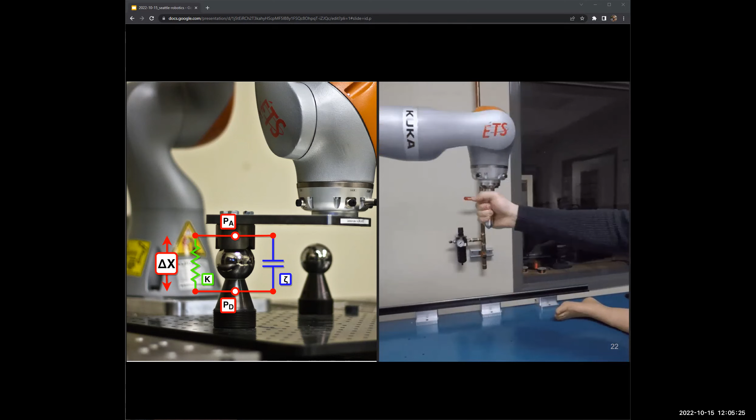So I'm curious about the need for force feedback. I'm wondering about the possibility of either disabling the drive and back driving the robot to move it around, then just using the joint sensors, which would require more manual intervention. The force sensing part is really difficult, and most of us aren't building KUKA level arms. But the point is being able to just get it into some position and have the joint sensors read out where the robot thinks that joint is, at all of those different positions.

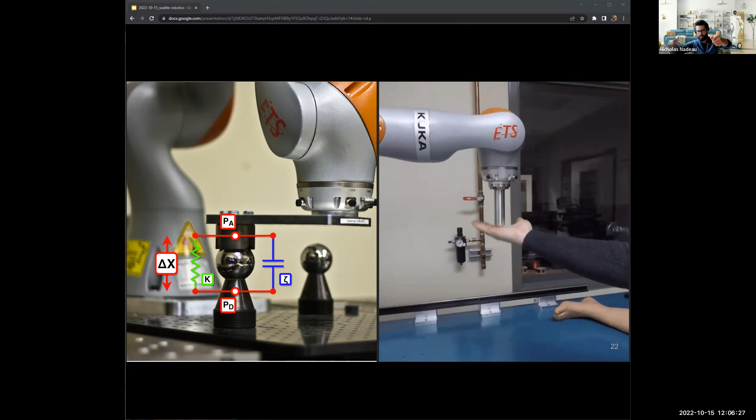There was another extension of this work we did that's essentially exactly what you said: turn everything off, hand guide the robot to position, use the magnet, snap the magnet plate on there, hit record, and manually move the robot around into whatever infinite number of positions we wanted. That was good enough.

That is perfectly doable. Otherwise, you only need one axis of force. SparkFun even sells little attachments for the end of something that just measures force in one direction. That's all you really need to do that final snapping—just the force in and out of the ball, your Z-axis force from the tool's magnet point.

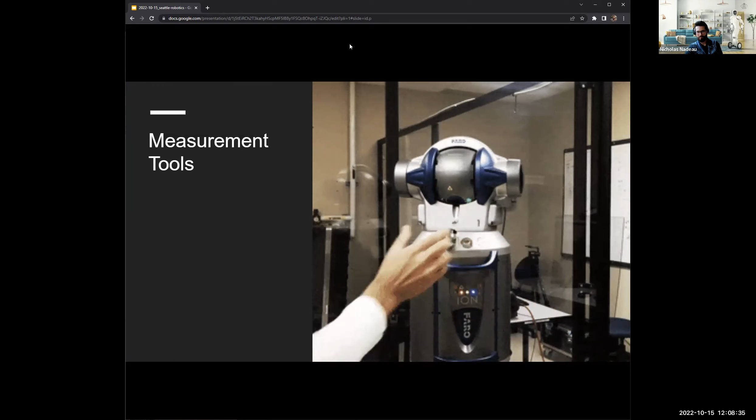So whoever managed to pull him in, I just want to say thank you to them as well. It was another presenter that Robert Kellogg found. I think that's all he does all day long, he just scours the internet and finds amazing presenters. We've had some great presentations, so I have a very large list to work with. I probably get maybe 1 in 10 generally will respond, but sometimes I just have to be persistent, hit them up a couple of times, and then they'll go, maybe this guy is actually serious. I think all these folks enjoy presenting to us because you guys are a great crowd. You don't boo them, hiss them, or throw tomatoes. It's awesome.